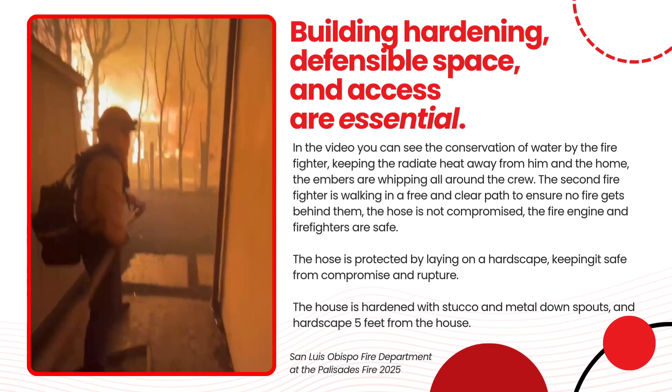As we move forward, I want to explain the why. Take a look at this video if it's hard to see. This is firefighter Doolin, actually at the Palisades fire. They've posted up at a house that was home hardened with defensible space. When this camera turns around, I want you to pay particular attention to the embers and the wind.

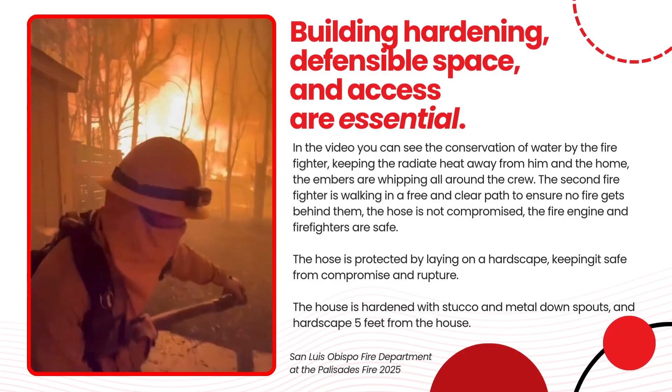Look at the embers flying down this alleyway. Because of the efforts by this homeowner, starting from the design portion all the way to the implementation and then the maintenance of this home, they were able to save 7 homes because they made this an anchor point. Our team got punched out the day after the fire started. They were able to make an anchor point and save 7 homes on that block, all because home hardening standards and defensible space was implemented into this one residence.

So you'll see in there his firefighting tactics. He's putting himself in front of that flame. I'm going to tell you right now, he's eating a lot of heat, okay? And he's doing that because he's passionate about saving this community. Those embers are going back behind him, and they're taking measures to cool the structure. You saw him doing water conservation in his nozzle technique. He's keeping the flames back. He's not going to put it out, but he's keeping the structure safe and keeping the embers at a minimum from going past him.

As Director Tway mentioned, we went from 68 parcels in the very high fire hazard zone in 2009, of which 34 had structures, to a grand total of 2,845 parcels now in the very high fire hazard severity zone. The LA Times classified San Luis Obispo County, and more importantly the city of San Luis Obispo, as one of the top 3 cities most impacted by the fire maps.

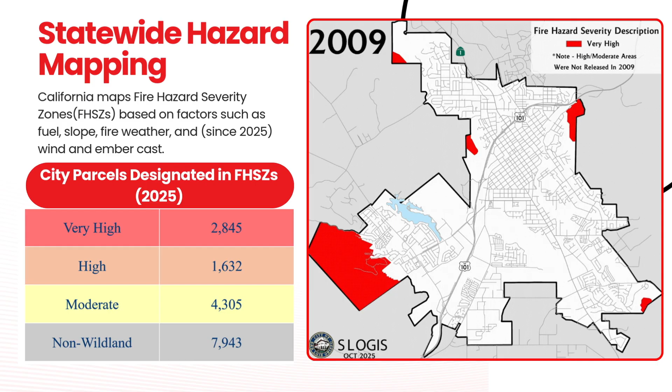As we go through this, it's important to remember the semantics of what we're talking about. There's hazard, which is the built conditions that have the potential to initiate or exacerbate wildfire, and then there's risk, which involves probability, vulnerability, and consequence. It's important when we talk about this with clients, with people at the counter, that we're always very clear about the difference between risk, hazard, and vulnerability, because this is a very emotional topic for people.

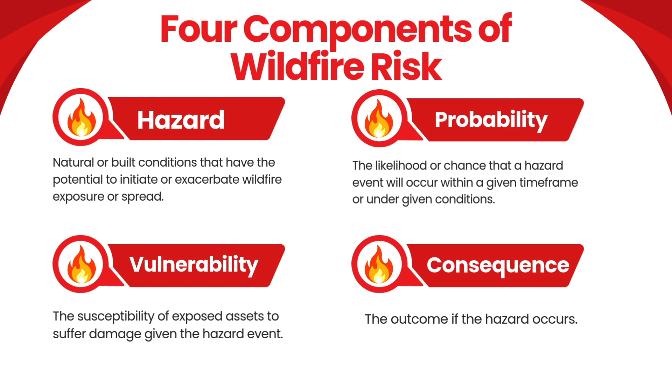It's important for us to remember the importance of the words we use and where this information comes from the state with these maps. People look at it and think, oh my God, I live in a very high fire zone. So helping explain to them what that means, risk versus hazard, is really important. We're happy to talk with you about how to discuss that with people if it's a concern.

This is information we probably all know, but California burns. This isn't new. We're actually doing some proactive planning around it right now, which is the silver lining, since this has been happening for a long time. Today almost 13% of Californians live in a WUI zone, and obviously it's serious. We saw what happened with the Palisades and Eaton fires, and these are the things we can do while building projects to help protect the community we live in.

The other thing we should pay particular attention to is the fire hazard severity zone, back to the moderate, the high, and the very high. It's also very interesting to point out that the state of California has never created a moderate zone in what's called the LRA, Local Responsibility Area. They've never done that; they've always done moderate in the state responsibility area. So when we got these maps, we were like, whoa, where's this moderate zone coming from? They've never done that before, and now there's this expansion of it.

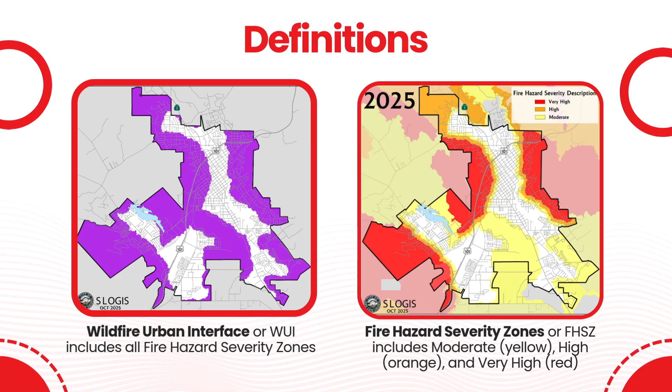So Chapter 3 defines how the maps are made, who is going to make them, and the frequency at which those maps are going to be made. And that's every 5 years.

Pause there for a second. If my job is to make the maps, what do you think my job's going to be in 5 years? Make more maps, probably an expansion. They're not going to be the same, and we're not drawing down. We can only guess the maps are going to expand.

Let's just make that a harsh reality of what's happening. The city has no say in that, even though we've already petitioned as agencies in this county to ask why the maps land the way they are. We wanted some information, and basically the state came back and said the maps are the way they are. You cannot restrict them, you can only expand them.

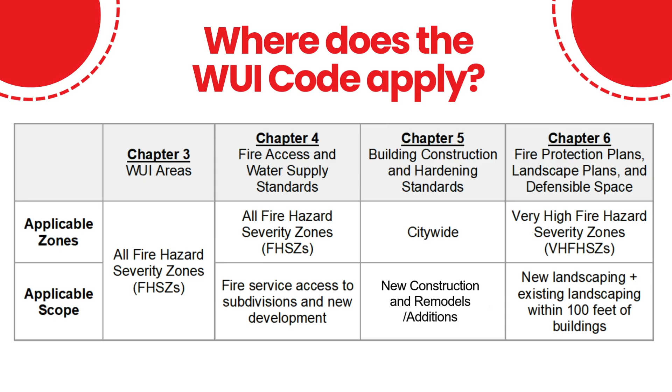Chapter 4 is your fire access and water supply standards. That's going to be the fire hazard severity zone, so remember the purple map. Everything in Chapter 4 is going—if your development is in the purple zone, it would be applicable to Chapter 4.

Now Chapter 5 is your ignition-resistant building materials, commonly referred to as home hardening. That's citywide—it doesn't matter what zone you're in, that's citywide.

That was because of a designator from 2012 where we were considered a community at risk. At that time, a lot of home hardening elements were brought into the city's standards, short of windows, gutters, downspouts—I think that was pretty much it at that time. So we were already really, really close to completely having a home hardening full aspect.

Now moving forward, it's the whole thing. All structures within the city are going to meet Chapter 5 requirements.

Chapter 6 is the defensible space. That's where you're going to talk about the area around the structure and outward—vegetation management, fire protection plans, and landscapes. That's only applicable if your project is in the very high fire hazard severity zone, the red zone. Chapter 6 is applicable to your project if it's in the red zone.

And this is where, just in talking with people, we're seeing the most confusion, the most concern. This is about people's yards, their gardens and trees. So this is where we're seeing a lot of concern from the community and a lot of focus we're putting into this section in particular.

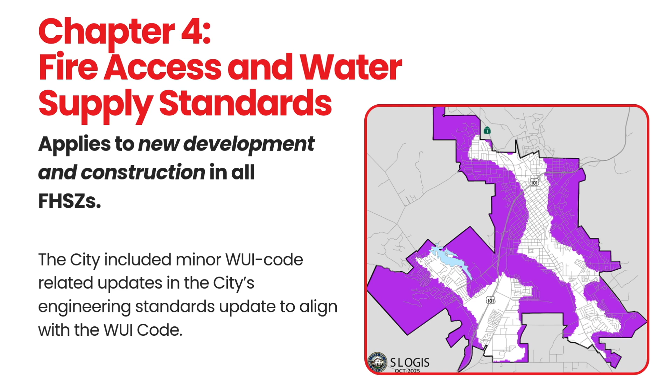And again, this is for larger scale projects. So if you're doing a subdivision, you have to do public improvements, and we've already updated our engineering standards to address a lot of the requirements of the WUI code. If you have questions about this, it's specifically Community Development Engineering, but again, it's generally for larger projects where you're building new infrastructure.

So Chapter 5, this is the special building construction regulations, or the building hardening or home hardening. It applies to all new buildings citywide, and remodels and additions to buildings, but only the project area.

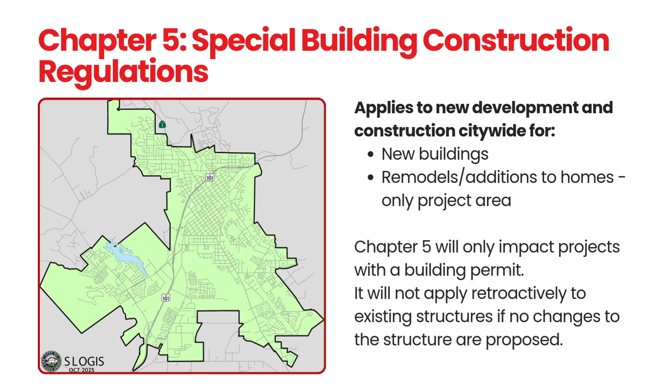So that's a question we've gotten: I have an older house, I'm putting a 1-bedroom on the back of the house, do I need to bring the whole home up to building hardening standards? No, just the addition area. But new ADUs, new homes, new commercial buildings need to comply with Chapter 5.

Again, as Josh was stating, we've already done a lot of this in the community up until now, so the biggest changes are windows, downspouts, and gutters. It only impacts projects with a building permit, and again, it does not apply retroactively.

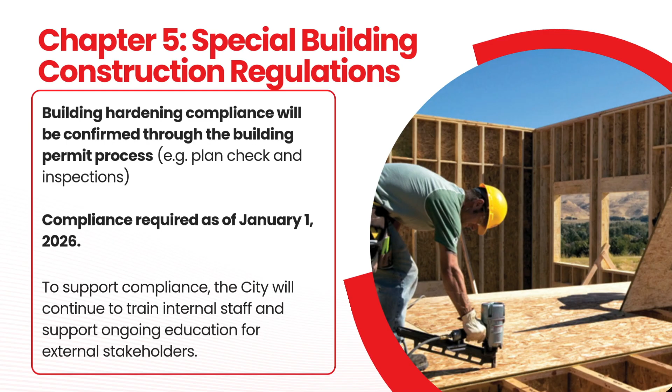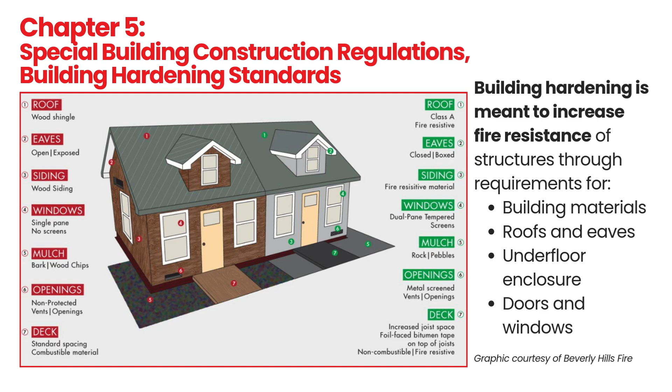We're not going to go out to your house if you live in the city and say you need to do some home hardening. It's just if you come in for a building permit for the area of the project, we'll check it through plan check. We're already doing this, staff is well aware. We'll talk to people at the front counter, and we'll also check it through inspections on the back end for projects. There are poster boards about home hardening covering building materials, roof materials, enclosed eaves, underfloor enclosures, doors and windows. One tip: we've started seeing decks come in too. A lot of people don't think about decks, but deck rebuilds and new decks often get caught up in this. So watch for materials, and if you have questions, the fire department has made some really amazing handouts, and we're always available at the counter to talk through this.

This is the fun stuff, Chapter 6. We did make a lot of handouts, and I brought a copy of each one for display if you want more. Every single one is also in digital form at slocity.org/wildfire, a brand new web page that didn't exist a month ago, built by Mika, who's filming, who locked herself away and went at it while we fed her a lot of information. So there's more information at slocity.org/wildfire, and all those digital information flyers are there.

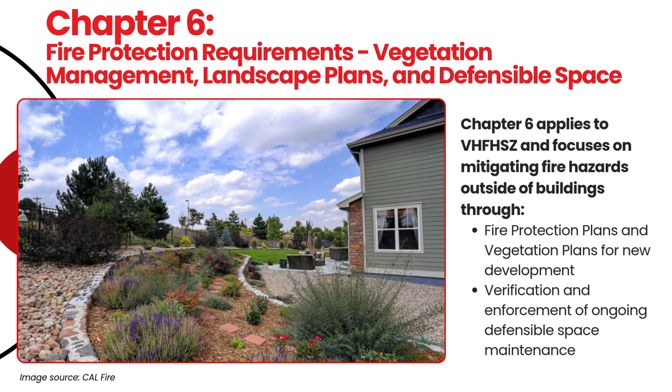So again, Chapter 6 is applicable to all of the red within the city. The biggest thing we're going to see, or what we're requesting in the plan review or submittal, is going to be the landscape plans. For larger subdivisions and larger developments, we will be requesting a fire protection plan — you can find that in section 602. For the smaller ones, single houses, ADUs, you'll be required to submit a landscape plan, which will be reviewed by my staff.

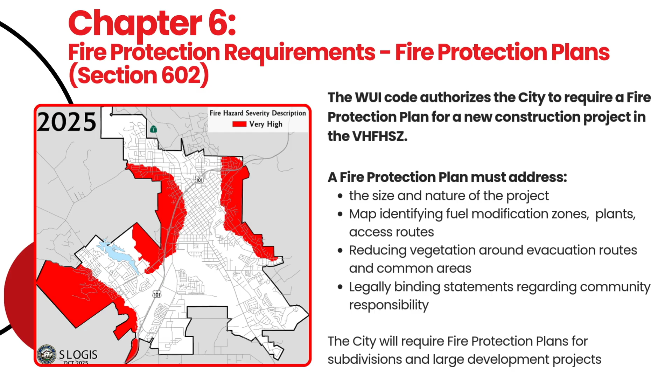This is one of those areas — let me start with the fire protection plan. It's for large scale projects: new subdivisions, new large projects, new large commercial projects. This isn't necessarily new information; we've asked for this before, it just hasn't been in one document. This will actually be incredibly helpful.

One example is the legally binding statements regarding community responsibility. We have a lot of new HOAs in the community, and now if someone complains about hazardous vegetation in 3 years, this document will define who in this community is responsible for making sure the vegetation is cleaned up in that area — whether it's the property owner, the HOA, or the city. This will help all of us moving forward in these larger subdivisions know who is responsible for what when it comes to fire safety, access, and egress being clear.

In terms of the landscape plans or vegetation plans that Josh was talking about, this is likely the biggest change in terms of projects coming into our office.

So first thing to check is this project in the very high fire zone? And if there's landscaping involved, or a new building, we need to see it, because you might not be touching the landscaping, but you might be putting an ADU in the backyard, and now you have issues with how close plants are to that new building, even existing plants. So your landscape plan might say we're not touching anything, but here's where existing plants are, here's what they are, and here's where the ADU is.

And so then Josh's team needs to make sure, okay, is there the required Zone 0 setback, how's Zone 1 looking, and further. These are things we are actively working through, trying to figure out how to get all the information we need and make it as easy as possible for applicants to comply. We don't want very fancy professional landscape plans if someone's just doing an ADU in the back and there's existing plants.

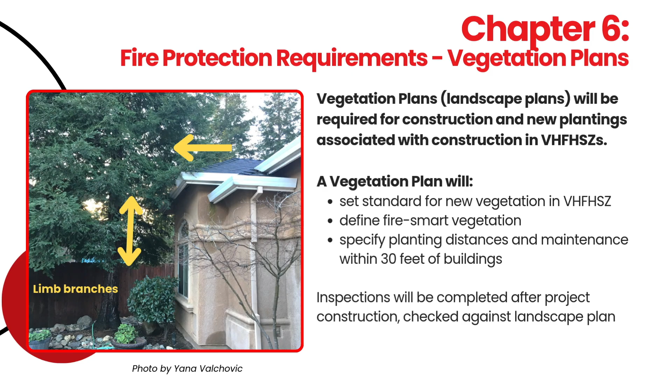So we have created some guides for the Community Development Department with basics of what your vegetation and landscape plan needs to include. We really want to see what plants you're planting. Distances are really important. We're going to come out with as many graphics as we can.

We're going to do outreach to nurseries and Home Depot and places, so if people come in and say, I want to redo my garden, but I'm in the very high zone, there's common language, there's a common understanding. Our dream is that Josh has a sticker with his face on it and his thumb up, and they put a sticker on each plant barrel, approved by SLO City Fire. If only Home Depot would sign off on that. Well, one day.

But we are doing as much as we can to touch base with everyone from landscapers to you all to permit expediters. The other thing I wanted to note, Chapter 6 is different than Chapter 5 in that it can be retroactive.

So again, when we talked about Chapter 5 with building hardening, we are not ever going to go out to someone's property and say you need to harden this building, because if they're not doing any work there, it is what it is. However, with defensible space in the very high zone, a neighbor could call, and we are going to do reactionary enforcement. A neighbor could call and say someone has a situation on their property, they are not complying with the defensible space requirements, and regardless of whether that person's doing a new project or not, they will need to comply with defensible space requirements.

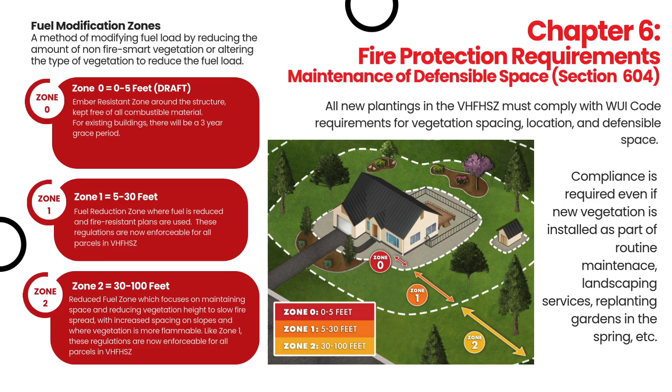If you have a property in mind that you know meets full home hardening and is defensible space, please hit me up, give me a business card. We want to be rolling out some examples and workshop videos. You want to jump in? Oh, my turn, okay, yes.

Maintenance of defensible space—what it really comes down to, as Director Tway mentioned with the covenants, is maintenance. Even when you look at the definition of fire smart vegetation, the 8 characteristics the state has defined, I believe 3 of those are maintenance in nature. It has nothing to do with what the plant does—it just means maintaining the dead, keeping the dead out. The rest are true characteristics of the plant. We don't want plants with high resin, right? We want to keep low resin, and we want something that holds a lot of water.

Those are called fire smart vegetation. So when it comes to fire protection requirements, it really comes down to the maintenance portion of that. I can't stress that enough. What happens is you develop the project, build this beautiful, gorgeous whatever you're building, and then I, as the fire department, it lives with me forever.

So no matter how many hands it changes, it always falls back on me. Whether there's an event there or not, or you just have that individual on the cul-de-sac who wants to complain about everybody. Let's say I'm that neighbor and I complain about your house, and then the fire department shows up and you're like, wait, what do you mean I'm out of compliance from this complaint? Well, I want to complain about him and him and him. And I just go from one house to twelve. That's the harsh reality of what we live in.

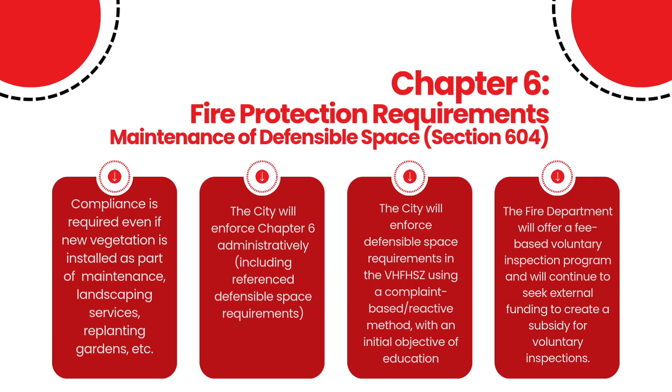I'm not the plant police. That's not what I get paid to do. It's not what I signed up to do. I'm not in the tree removal business either. But at the end of the day, I am in the business of keeping our community safe.

The other component we have to mention briefly is the insurance component of this. At the end of the day, the government code actually allows them to come in and say, if an insurance carrier says you're out of compliance, they can drop your insurance. They can force you to do more above and beyond. I also want to mention the last half of that small paragraph states, in conjunction with me, so I have to be in agreement. They can't just arbitrarily do that.